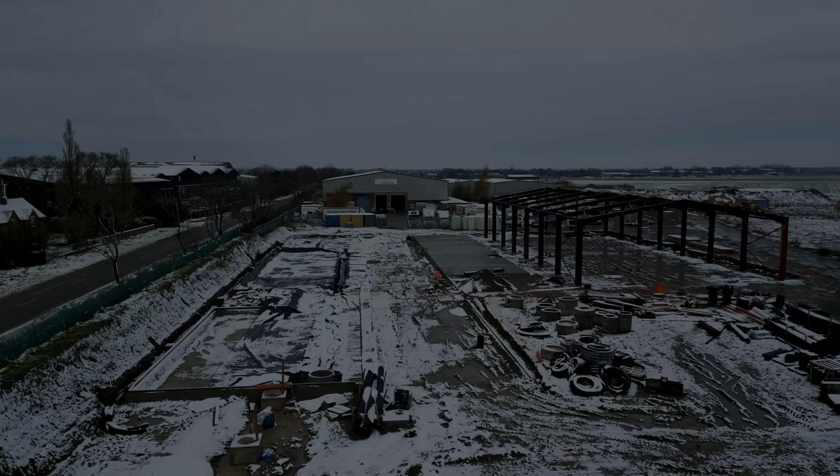This time on Blake Builds: in this week's episode, it's beginning to look a lot like Christmas. Warm enough for you? The boys go insane with the membrane, and Ollie goes insane in the brain.

Well, welcome back, you've joined us at an opportune moment. As you can see, I'm a bit hoarse still, so I'm not 100%, but I'm back at it. We are on the service yard, another episode on the service yard. Anyone would have thought it was a big job. As you can see, we've put our curbs round, which you'll have already seen us doing. The boys did a great job in my absence, although I've done a bit up there with them.

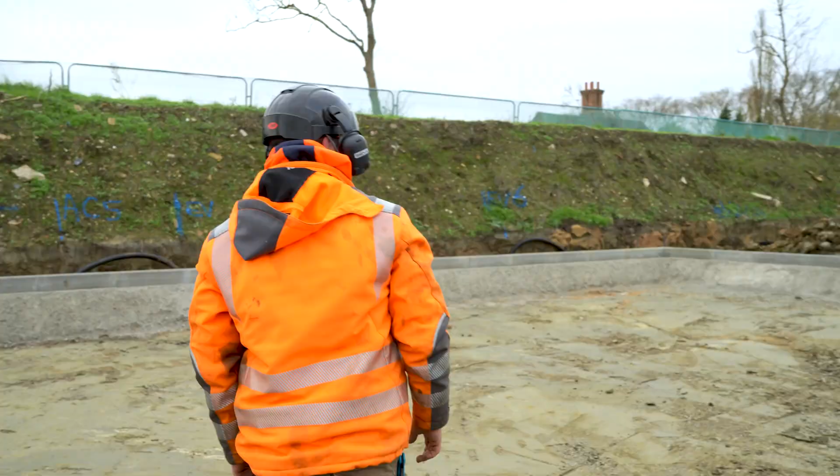Believe it or not, this depth is our attenuation. There's more attenuation in this. So we've now got to plastic line this basically like a pond and backfill it with 420 aggregate, which is an open aggregate, meaning it's got no fines in it and will actually hold water. Then there's this big trench which is like a sump, and all the water will run to that, run into here and run away. The idea is that when there's a heavy rain downpour, it will pool in here and slowly drain out through an orifice control valve, which is basically a hole... and it's 46 mil. So all the water from this whole area is going to go out through just a 46 mil hole. It's amazing, isn't it? There's perforated pipe in here, which we'll get to in a bit.

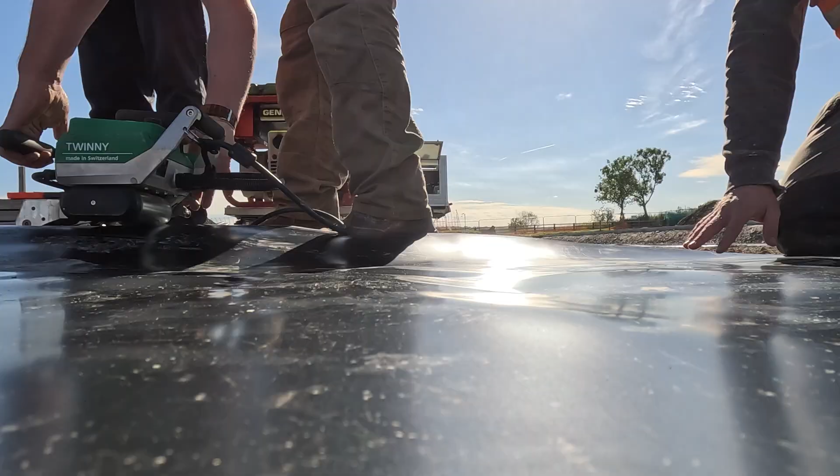But we have to weld and join this membrane together using a very fancy tool, this membrane welding machine. It's the same technology they use to cap landfill sites. Believe it or not, when your rubbish goes to landfill, as it breaks down it makes methane gas, and they cover the whole thing in plastic so they can capture the gas, then run generators off it, which generates electricity rather than it going into the air. So it's a similar thing, a bit like a giant pond liner. We're going to line this to hold the water in and then control the flow from it. Easier said than done.

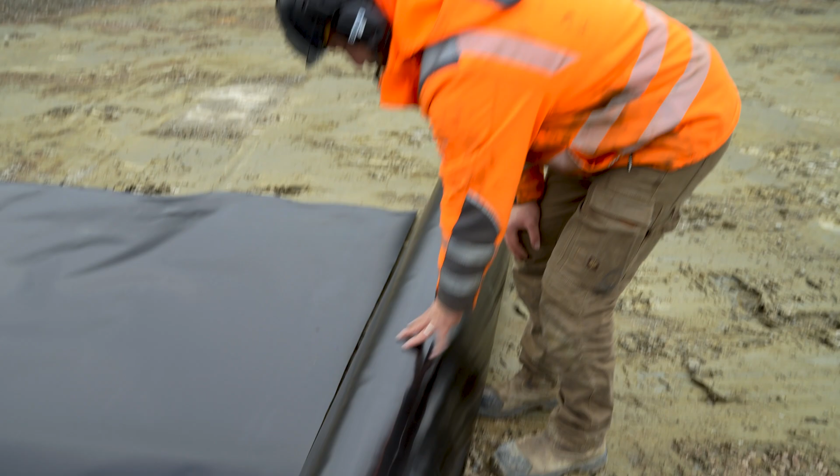This roll weighs about 200 kilos. So while it looks nice and lovely, it's an absolute nightmare for manual handling trying to move it about. We have to keep strapping it, lifting it, moving it. The biggest issue is it all bunching up.

So we've got a manhole that's going to go in here, just there, and that's going to drop down in there, but it needs to be encapsulated inside the plastic. So we've got to weld two bits together, push that down in it, and then weld a bit to go up the trench, which you'll see us do. Wish us luck.

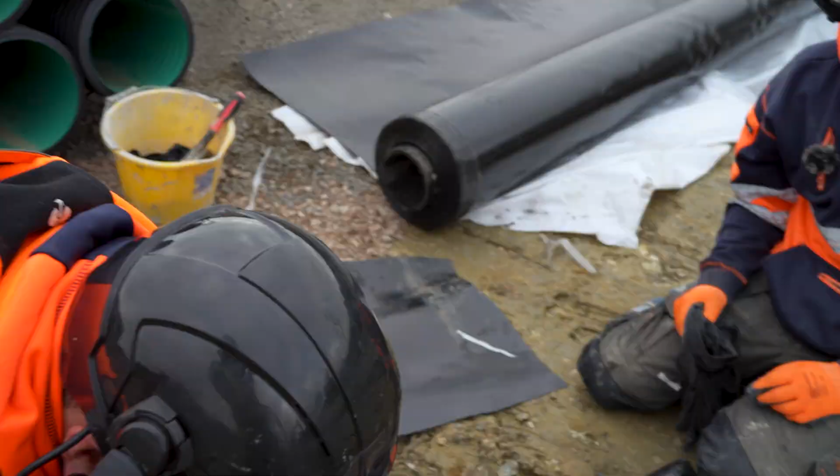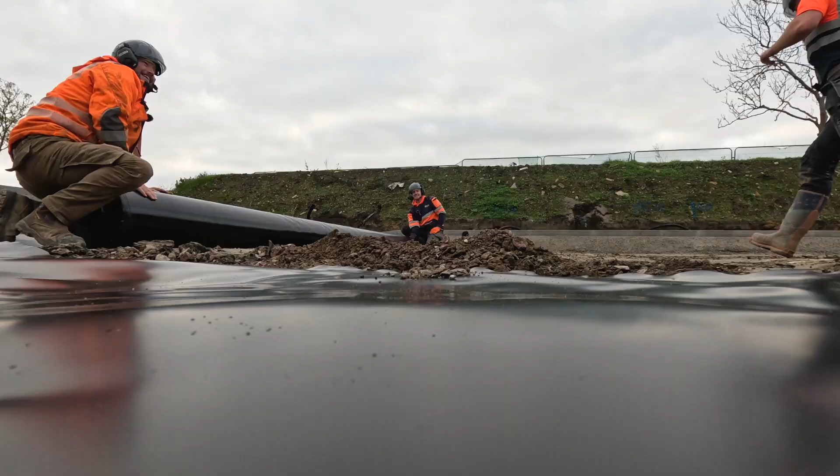We're going to go to here, a little bit further, aren't we? Back there - how are we going to get a nice straight line then? Cut. Use the edge of the roll. Where's Evan when you need him? This sort of thing is an Evan job, isn't it?

Grab your legs and pull you along? Yeah, good do. Cameraman needs to be stood where I am. No, he does - that's the money shot over here. No, he does not. Oh my God, you should see how weavy it is. Marco, if you're watching this - yeah, not good, not a great idea. Put that one in the middle like we do when we pick steels up, and you just touch it to the balance point. Yeah, then we'll pick it up. Sure thing.

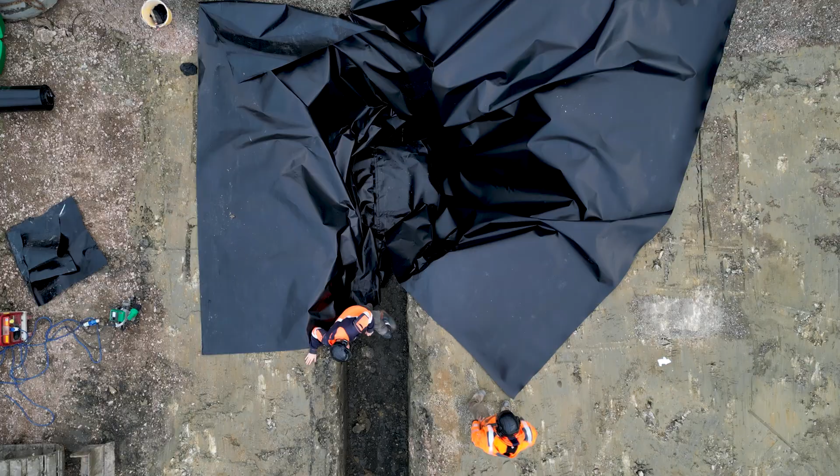Can't do it without folding it, can you? Let's pull this up here like the trench piece. Yeah, and have it sit in it and just have a look at how that looks, shall we? Right, you just stand on that edge. I'm such a child - when do you pull it that way? Did that hurt? No, that's fine.

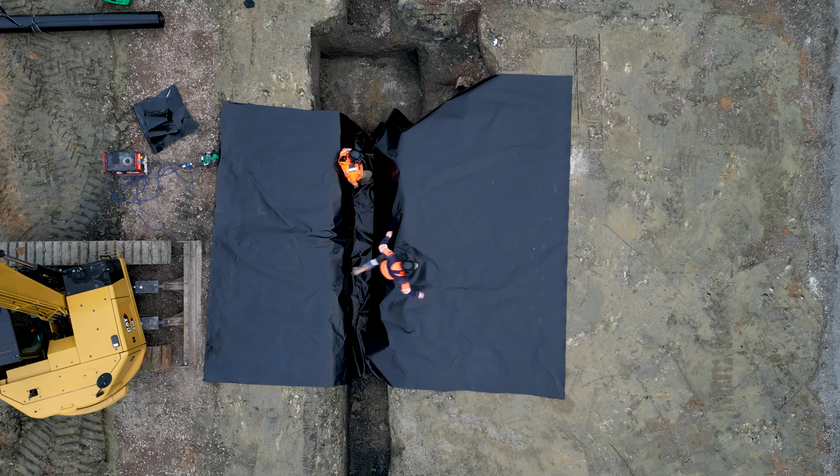And now to Evan with the detail. So, detail of mission control what we've got. Yeah, mission control, I've got a new screen and now I can see everything, so I can plug into the matrix.

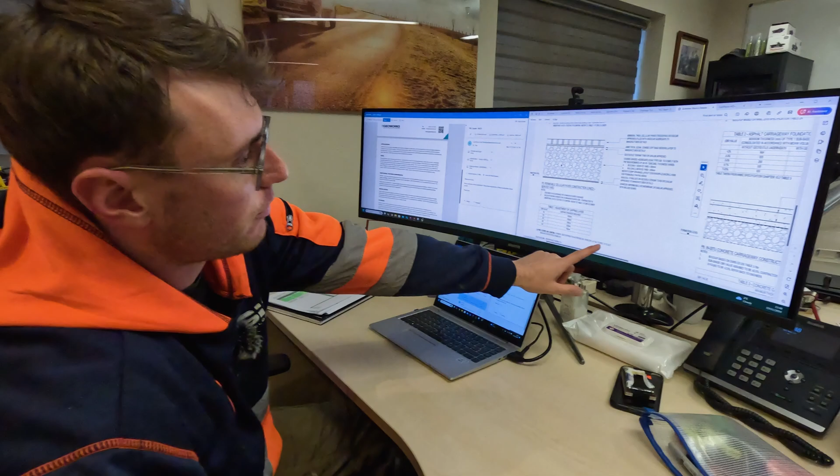You'll have seen this drawing before on the last couple of episodes, I think, where we've been doing a bit of concreting, and we explained a little bit about how we make up the ground underneath the concrete, where we've got the layers of the different things, the membranes and the hard core and the reinforcement. Well, we've got the same thing for these cellular pavers here.

There's a predetermined value that we've calculated by having CBR plate tests done to see how stiff the ground is, and that calculates how much hard core is required in order to be able to run a HGV over these pavers. You can see that it's built up in layers.

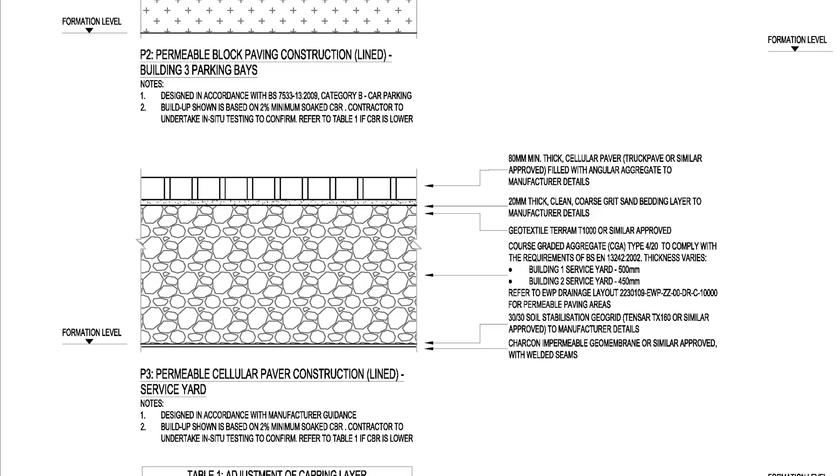So we'll start from the bottom and work our way up. You've got this impermeable membrane, a 0.6mm high density polyethylene impermeable geomembrane. This is a slightly different attenuation system here. They've got crates and we're achieving exactly the same thing, but instead of having the voids in between bits of plastic, it's in between bits of gravel.

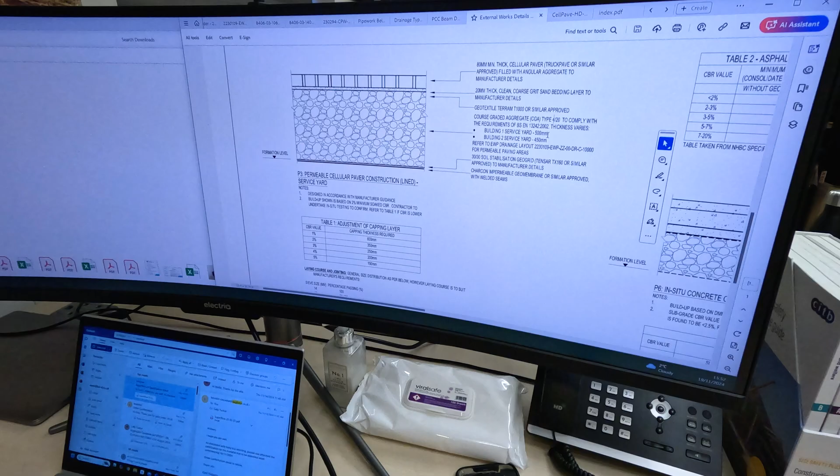We weld all that together, and then on top there we've got this 30 by 30 soil stabilisation grid. This is all of our aggregate here. This coarse graded aggregate type 4/20 essentially means pieces of granite from 4mm up to 20mm, and it gets graded through a massive sieve at the quarry. This is the spec sheet for it, showing the sieve sizes and what's allowed to go through.

On top of that goes this Terram geotextile that I was telling you about. That acts like a big blanket, containing all of the aggregate or anything sat on top of it and spreading the load out. So you require significantly less material on top of a bit of geotextile like that than you would if you were putting it directly onto the clay, because the bits actually sink into the clay and don't act as well, whereas this spreads the load out.

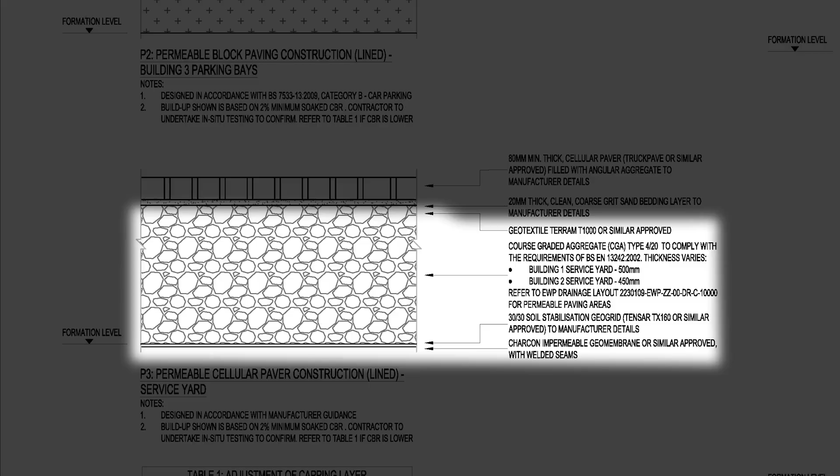So that goes on top of the aggregate, and then on top of that goes the 20mm blinding layer of sand, on which we will then bed these cellular pavers.

The product is here, it's called CellPave HD, and this is directly from the Groundworks website, the people we bought them from. So these pavers are what we've got on site. This is the curb edging, and this is pretty much how it's going to look, apart from the curves will be the other way around.

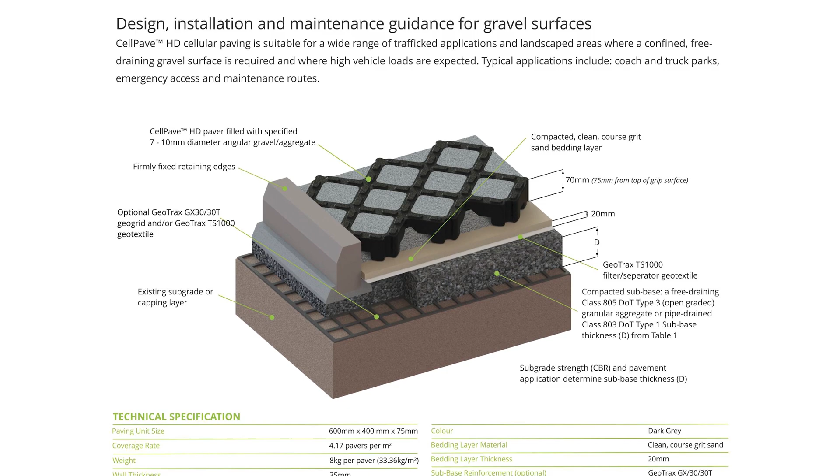And then in between the grids, we'll brush this aggregate, which will bind it all together and make a nice finished surface, a nice permeable surface for all the surface water to go through. Hopefully, not have any problems.

He's just showing his new big screen up. I am really, it is a beautiful screen. It's great, isn't it? That's a good illustration.

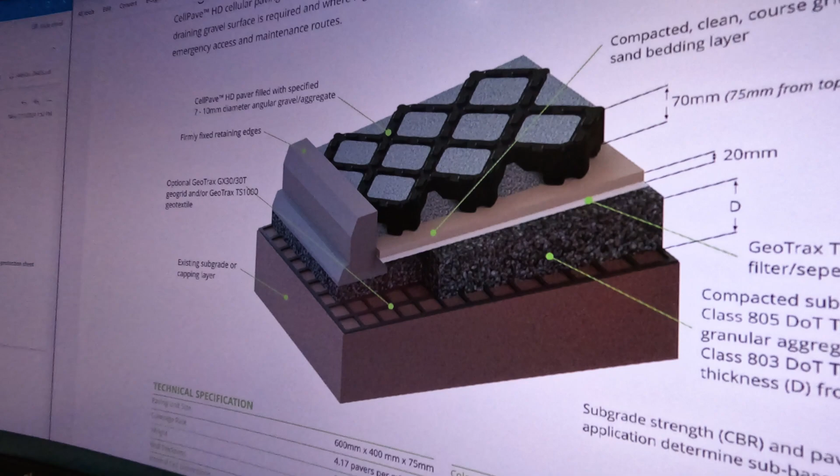Yeah, that's exactly what we're doing, something like that basically. This is good because it shows you the concrete makeup underneath the curbs. That's similar to what we've got, although we've put a load more concrete in. We didn't bother with the hardcore, did we? No, not really.

And this is the soil stabilisation grid. We've got an extra layer here underneath because we don't want any water escaping out. We want it all attenuated within that tank we're creating, because we want to stop any hydrocarbons or any nasties sinking into the ground. It's all petrol and everything - it's all about the environment, duck, it's all about the environment.

You may have seen us all scratching our heads yesterday when we were looking at how we're going to go around this manhole. As with a lot of things in life, have a cup of tea or leave it overnight and problems solve themselves, and we've come up with a solution. So basically I've hand welded it this morning with our hot air gun and the roller. We're going to exclude the manhole from it, concrete round it and basically encapsulate it with the plastic in a different way, which you'll see us do anyway.

Thoughts on this? Oh my God, it's hard work. This project is amazing really because some things are really easy. Some things that you think are going to be easy are hard, and things that you think are going to be hard can be easy. It's really weird and doesn't seem to make any sense sometimes, but positivity and perseverance always get you through, don't they?

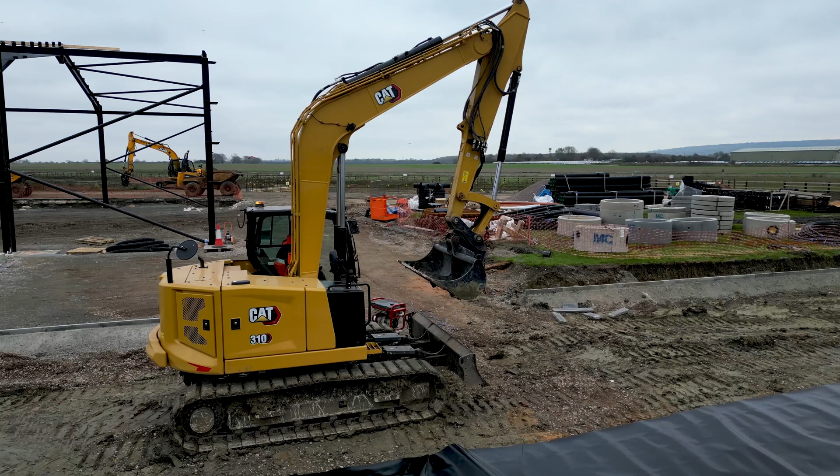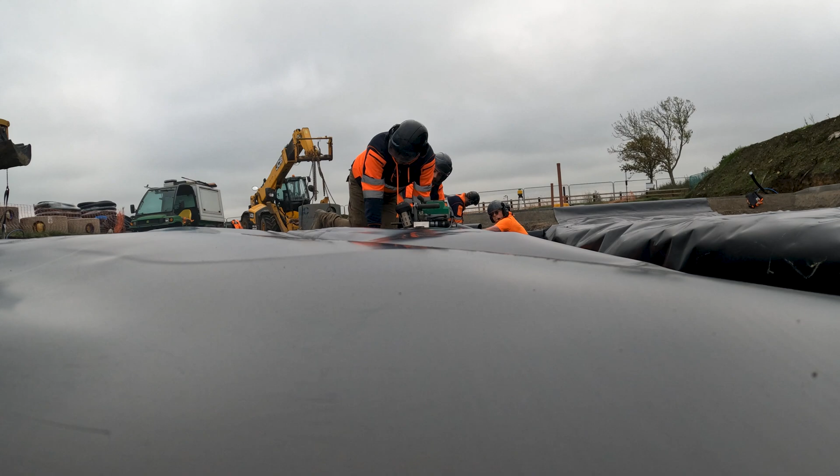So here we are doing a wonderful job of joining the membrane that goes underneath our attenuation in the yard. We're using a Leister, what's it called, a T720.

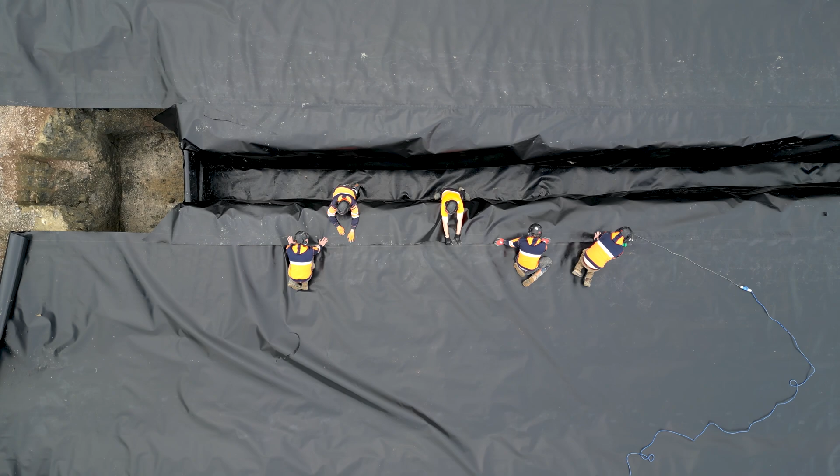So it's actually crushing the material together. It's got a Newton gauge on it, so it's crushing them at 500 Newtons. Newtons is kilos if you knock the zero off, so it's 50 kilos of pressure pushing them together. And then this hot air gun is blowing hot air in between the two layers, and it's being squashed together and driven at the same time.

Relatively straightforward and easy to use once you get it set up, but in site conditions it's quite difficult. Good weather today, but it gives rain next week, so we're trying to get all this done before the rain comes.

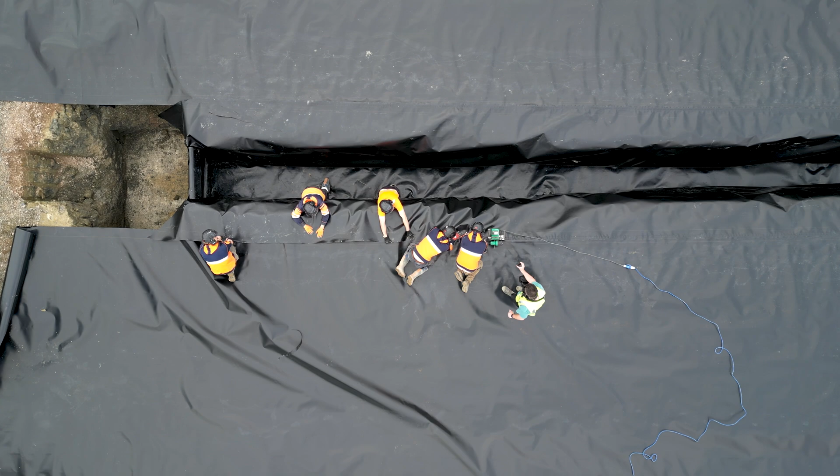Another cool bit of kit. We're not quite as excited about this as we were the Bomag, but it's pretty good. You just have to keep it in line, keep it straight, keep it going. 540 degrees is what the hot air's actually coming out at, and it's melting the two layers of plastic together for a permanent fix, basically. It's as strong as the material itself. Just takes a few cowboys to wrestle it - you'd come at the bit where it's all bunching up funny, wouldn't you?

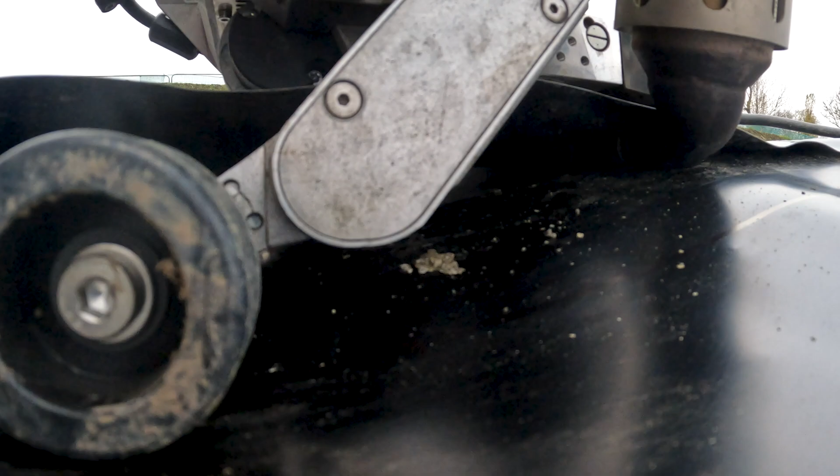So there you go, as you can see here, got the cage on the top, and it's feeding in along there. The bottom one is tucked underneath. You can see the hot air is pinched in between it, and then the rollers at the front - those rollers are knurled, so they've got a pattern in them, which enables them to be crushed up together.

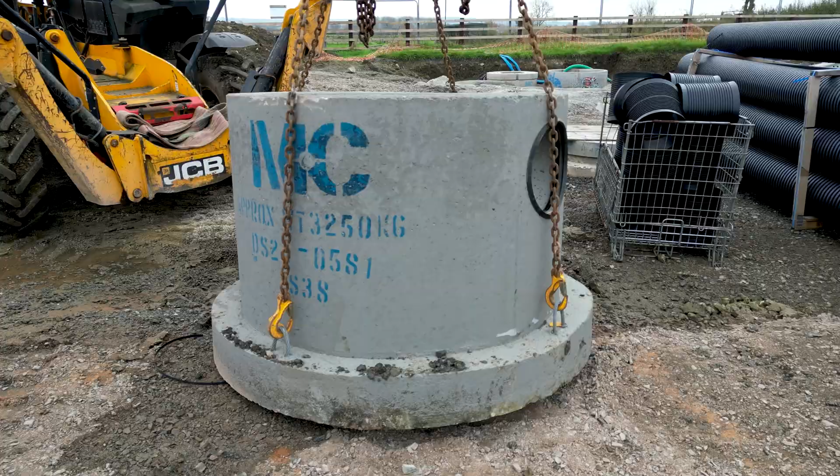How's that back edge looking? Yeah, beautiful. Go down and boom in a little bit.

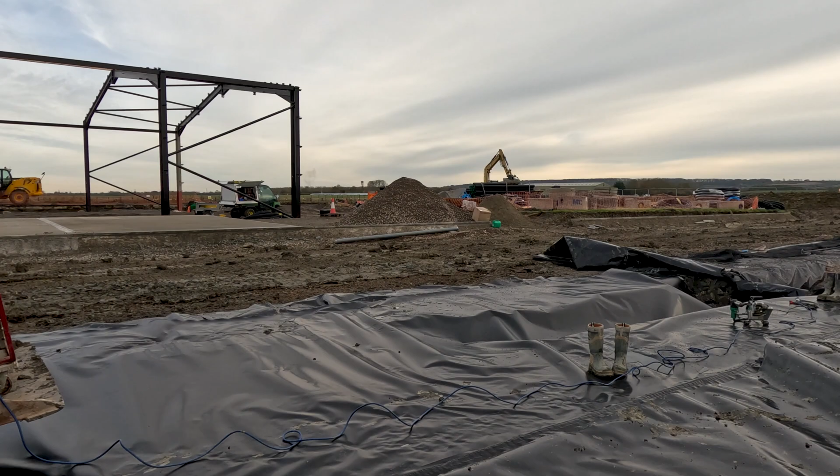So we're putting plastic underneath. You can see over there that we've got our trench in already - there's a trench behind us, but it's stretched over it at the moment. We're racing because it gives snow tomorrow, tonight, certainly rain, so we're racing to try and get that done.

We've welded this, which you've already seen us use the £12,000 welding machine, which I can't quite believe is 12,000 quid. But it's only £450 a week to hire. There's only 4 in the country though, so not many about to hire anyway. But it makes light work of that - 2.3 meters a minute we were doing there.

So now the job is to try and get this clean again, ready to join the next sheet. Should be relatively easy actually. We've just got to clean this off, haven't we, so the welder doesn't get chopped up full of clay.

Yeah, and I was thinking about this - we can lay the next sheet here. Oh, that's a good idea, to fold on, exactly the same as that one. And then we can weld it down there. All we've got to do, because we've got to clean that side. Oh, you only need to clean that side then, just got to clean the top. And that's why you're the boss. I don't know about that.

A clever man wouldn't be out here in his socks, and you with your feet out. Ollie's now got wet and dirty socks, so when it comes to put his boots back on, his feet will be cold. I went for the option of saving the socks over the short-term pain of having cold and wet feet, so.

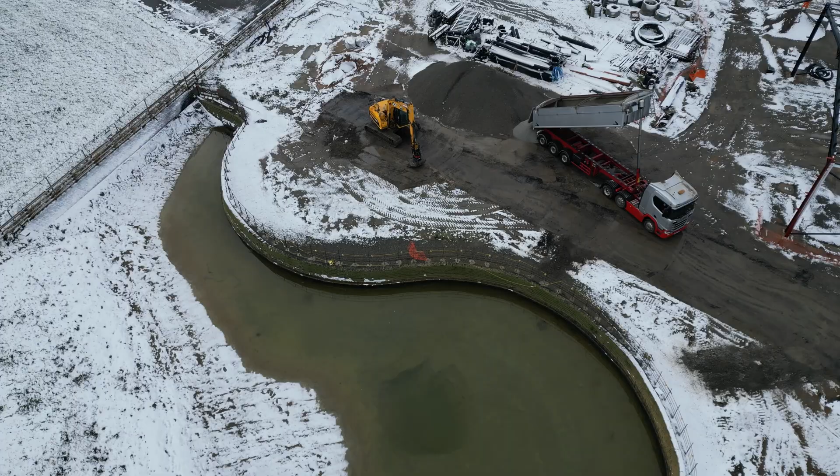Afternoon, all right. Warm enough for you? Oh, only just. So we've had a load of snow overnight, which typically would happen when we've started to dig the rest of the service yard off, and we've put all that membrane down, which we really wanted to keep dry and clean. So it snowed - makes sense. That's usually what happens, something goes wrong when we decide to start something, but it's fine.

We've worked around it. You can see that blue mark on the floor - that's basically the junction between the impermeable part of the service yard, which is the concrete, and the permeable side, which is the cellular pavers. This Celpave HD paving solution.

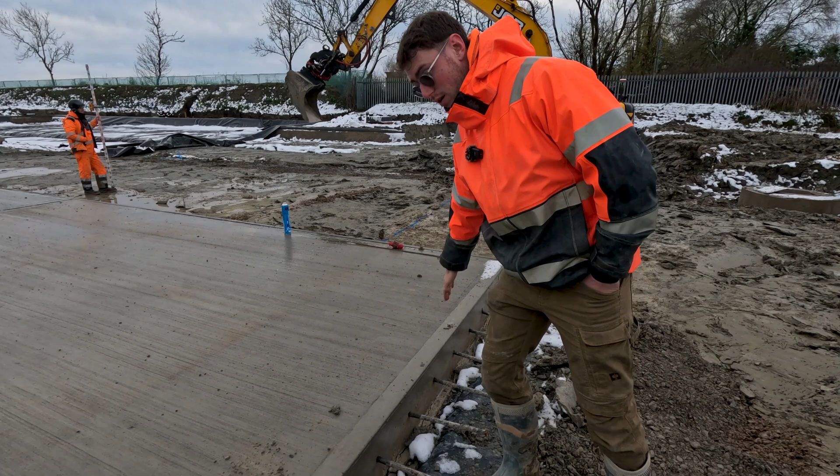So I've used a spot man to mark out every metre or so, and they've pinged a string line in between to get it nice and square, and sprayed it out on the floor. Exactly what we've done here with these pin curbs on the edge of this part of the loading bay, they're going to do where that blue mark is, except this time we're going to use some steel - 6mm thick steel, 300mm deep, comes in 6-metre sections. We're going to use that to make some forms, some shuttering, similar to what we had on the sides of these loading bay sections, except we're going to make them ourselves and bend it round on a radius.

It's been a while since I've driven the Gator, actually. Yeah, it's been a while since I've been in it. Got a bit of a roadblock coming up by the looks of it.

So I'm just off to show you these cellular pavers that I keep banging on about. We've had loads and loads of them delivered, and this isn't all of them - I've postponed the order ever so slightly, but here they are. Pallets and pallets. Oh my god, I had no idea these were here. Tons of them. So we put them up out of the way because, I mean, you can see how many there are. Pop out, I'll show you.

So this is what's going to go on top of the permeable area of the service yard. These are rated for HGVs to run over - a really, really solid product. Got them from a company called Groundworks. We had them come out and meet us and show us the product, send us some samples. And they're made out of recycled plastic - you can kind of see all the little bits in them.

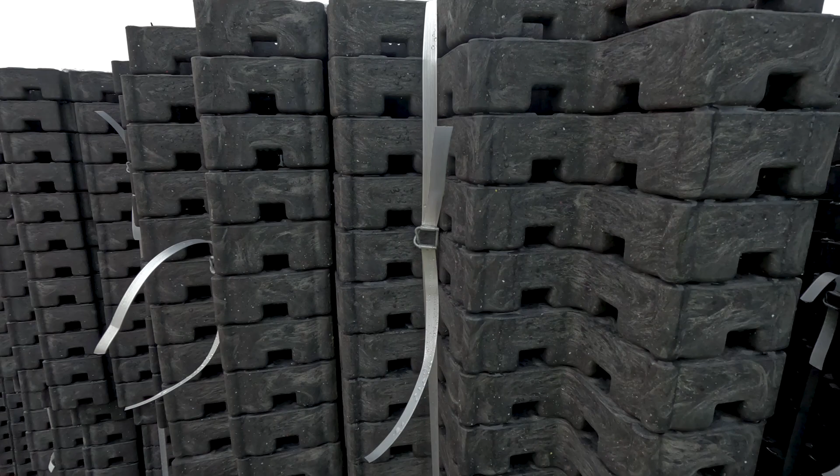And it's kind of in fitting with what we're trying to achieve on the project - use recycled materials where we possibly can and sustainable building practices. There's another product very similar that we had a look at to start with, but I did some research and they were based in Germany and a bit more expensive. These are manufactured here and distributed from this country, so lower carbon footprint, lower embodied carbon, recycled product.

It's a good bit of kit. Probably, I'd say it's probably the same amount of money to do this than it would be to concrete in the end - probably a bit more time and effort to do this. There's a massive manual handling element, these pavers obviously have to be laid by hand. It'll make everything so much easier though - there'll be no more pumping out like we have to do every single day at the moment, because the drainage system will be up and running. It'll keep the whole site cleaner and it'll look really good on YouTube, which is obviously the most important thing now. Stay tuned, that's it.

Right, let's get going. Whoa.

Hello, Mr. Blake. Hello, Mr. Newbold. It's been a while since we've done a little walk around together. I know. So here we are - welcome to our swamp.

Biblical amounts of rain, was it? Biblical, yeah. I don't know, Mother Nature's always out for you, isn't it? It must be funny being in the profession of meteorology, mustn't it, trying to predict the weather. And it's obviously very unpredictable at the moment - I'm going to be kind and say it must be unpredictable, because they're not very good at it, are they? They only seem to be able to do the day almost. Yeah, like last week we looked and it was going to rain all week, and now it's all right.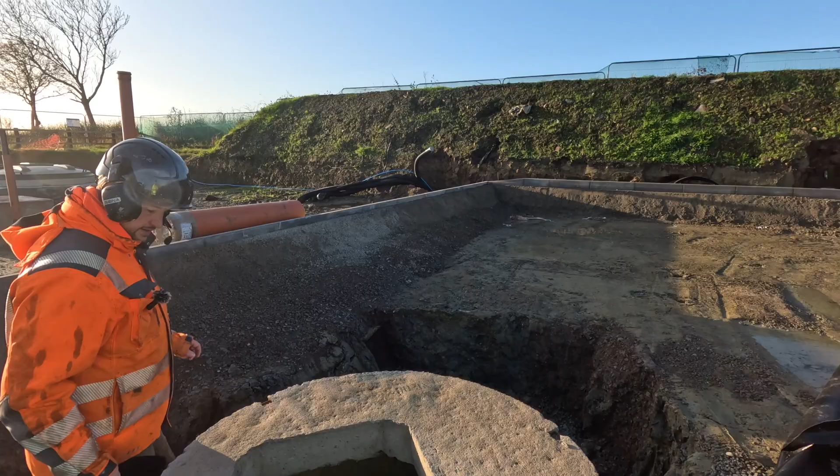Now go on here, it's a bit slippy. So you can actually see that our attenuation in here is already working - this trench is already full of water. So you can, in that gravel, look, it's actually full of water already. We're still on our petrol pump at the moment. Oh yeah, that's full as well, look.

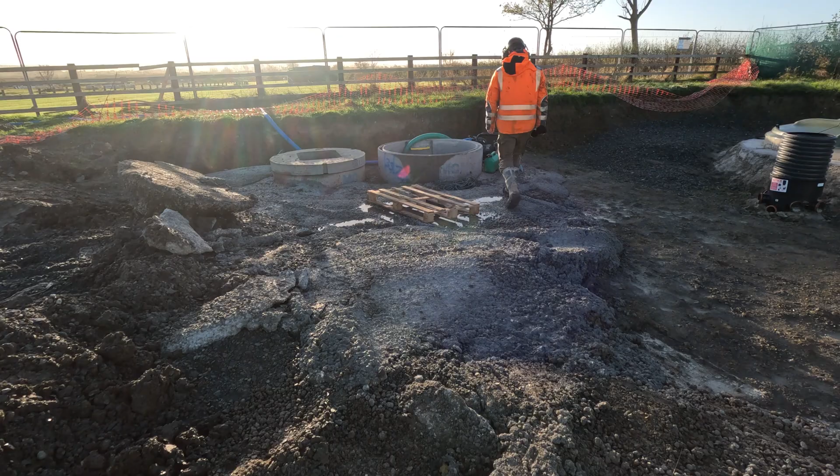Trials and tribulations of filming on a construction site. Oh, look, you've got a dirty muff. You don't want to get your muff dirty, do you? Christ. First rule of anything is to keep your wind muff clean. Yeah, terrible. Oh, thanks, mate. I'll clean her up inside, probably.

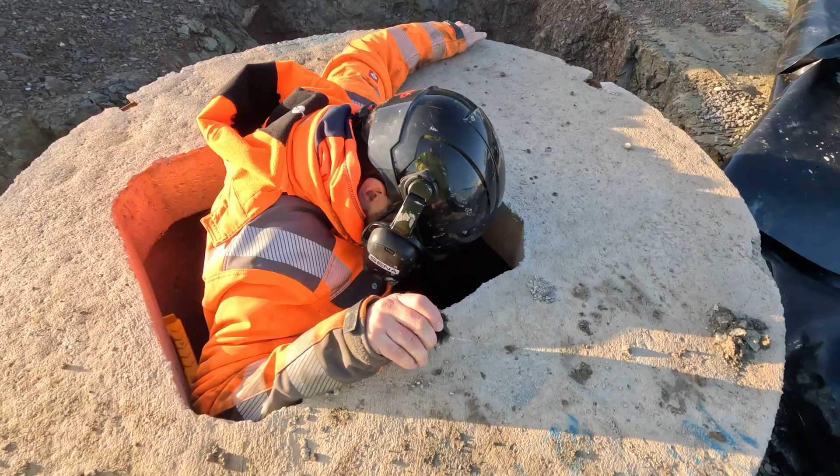We've got a bit of water. Yeah, have you? You got some available? Going in - oh, it's deeper than my boot. Oh, God. Watch your head on the way up. Watch me drop mine in. Oh, this will forever be the muff cleaning manhole from now on. Oh, you know what, go on - the bloody boot's got a hole in it. I think I had that this morning. Oh, yeah, I found the trickle. I put my boot in the water, haven't I?

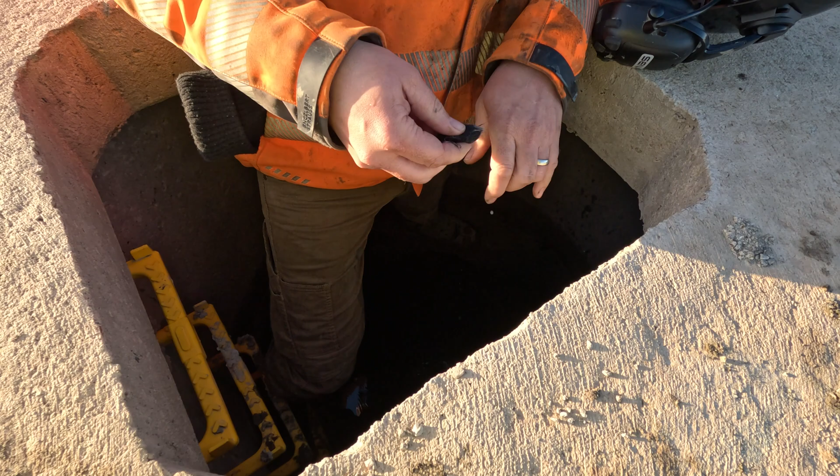Oh dear, we've got to dig all this off. This looks horrendous at the moment. We've actually left 200 mil on here for this exact reason - it's like a sacrificial layer. So when we come right to the very end, we'll scrape that off back to the finished height. It looks a lot worse than it is.

We've got 3 manholes to put in here, but they're almost at the surface, only down a little bit. They're level, and they've got permeable pipe in them, and the idea is that it collects the water that drains in here. Think of it like a giant pond, but filled with gravel, and you drive on it. This pipe work enables the water to go down through that interceptor, to that tank, and then be pulled away. The idea is it will attenuate in there, gathering up.

So what does the placement of 3 new shallow manholes give you that can't just run off into this deeper trench that you've already got? In a flash flood event, it needs to be able to move away. And also, in time, the attenuation could well start to silt up, so you need a way of clearing it.

I made that up on the fly, really. Well, it doesn't convince me, having them, really - it should go through that gravel and go to that trench, and it should all go out that trench. It's another rake of expense. That was one for the engineers, was it? I'm sure there's a logical explanation to why we'd need to spend thousands of pounds on manholes and more perforated pipe. There's logic there, I just can't see it, I'm sure.

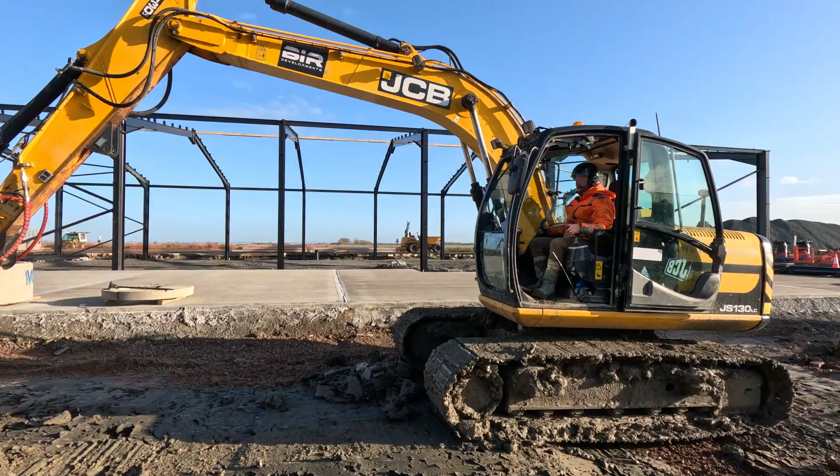I love that - these ones are slightly different to the other ones. These are literally almost at surface height, just in the attenuation, and in fact we've got to dig a little trench in because they act like a sump, basically, to drain off the ground.

So the plastic is going to go over this next, which is a little bit different to how we did the other stuff - because we excluded the manholes from it last time and plastic round them. Whereas this time we're actually going to leave the manholes in it and plastic underneath them, encapsulating the whole thing.

I'm just pulling this off level, or close to level. Won't be perfect, but it'll be pretty good - he says as he takes a big 3-inch chunk off.

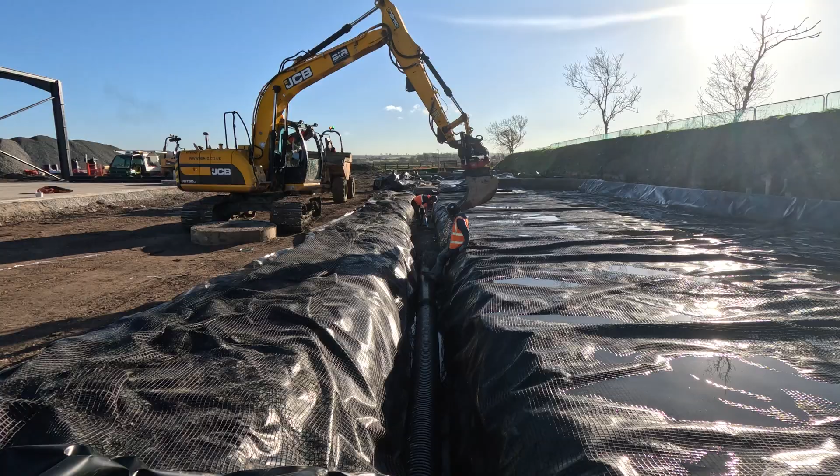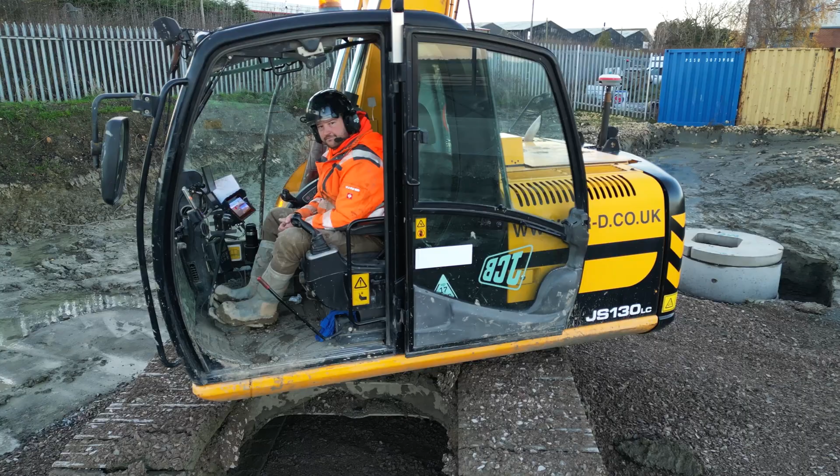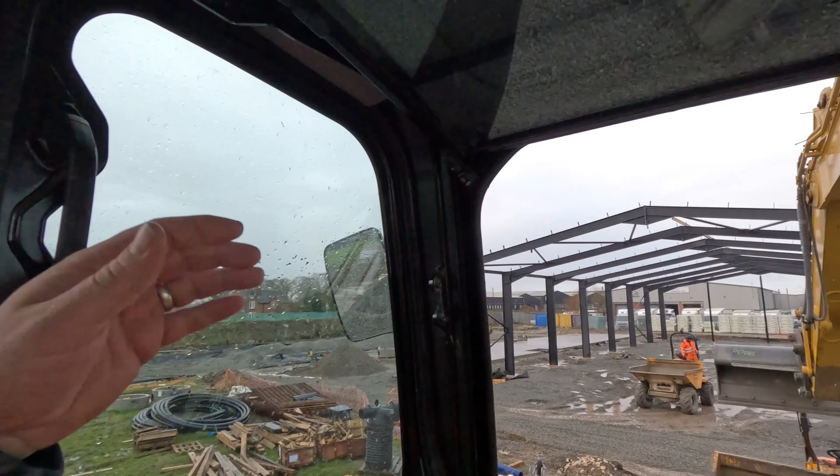So here we are digging again on top of the pile - Mr. Benjamin Cora over there. I've got a little pouch with the kit in. And yeah, so we are atop, about to go right down, and we're going to go and level off a bit of ground.

We've been loading out together - Ben's been doing it with the dumper and I've been loading him. Clean, almost like gravel, but it's granite. I've not left that digger in a particularly good spot, have I? Getting carried away with the camera, that's what the problem is.

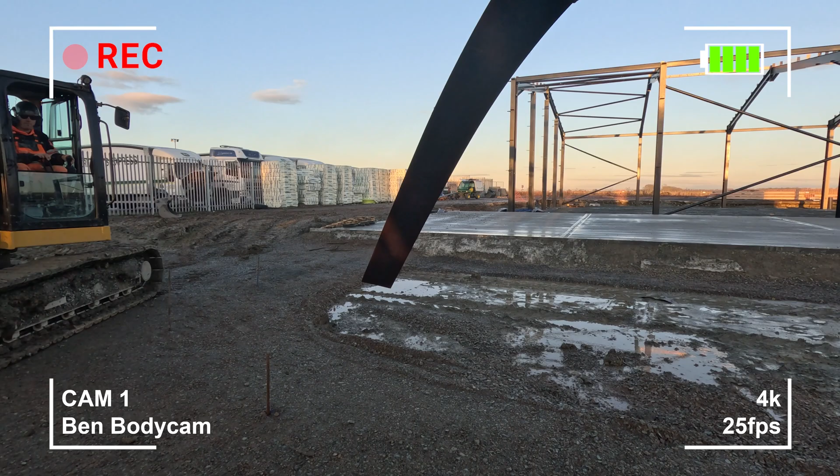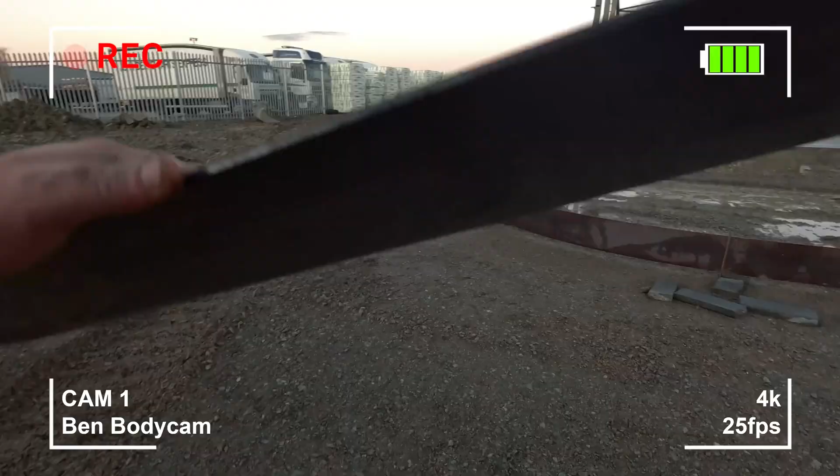Come towards me a bit. Okay, put it down slowly. And stop there. Yep. Down she goes.

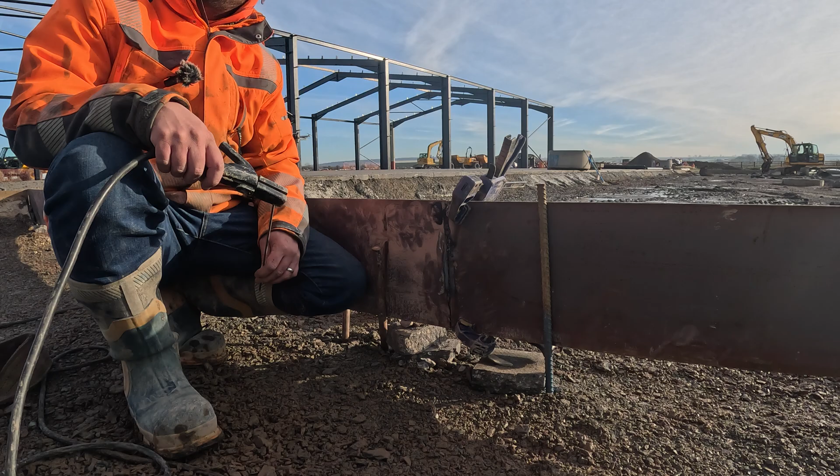So welcome back to Oli Blake doing another task. Not that I'm a jack of all trades, master of none, I think is the term, isn't it, that everybody uses. So I'm going to attempt to stick this together with a bit of stick welding.

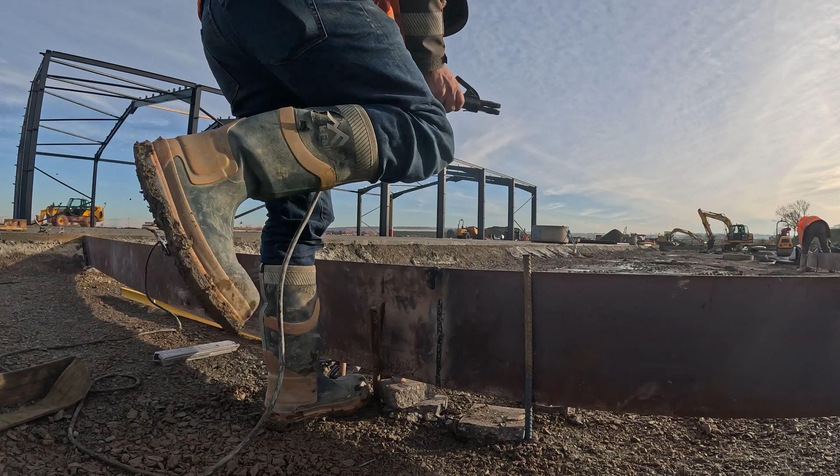I'll give that a tap off. I blew it away in the last one. Let me just put a tack on the very top there, just to...

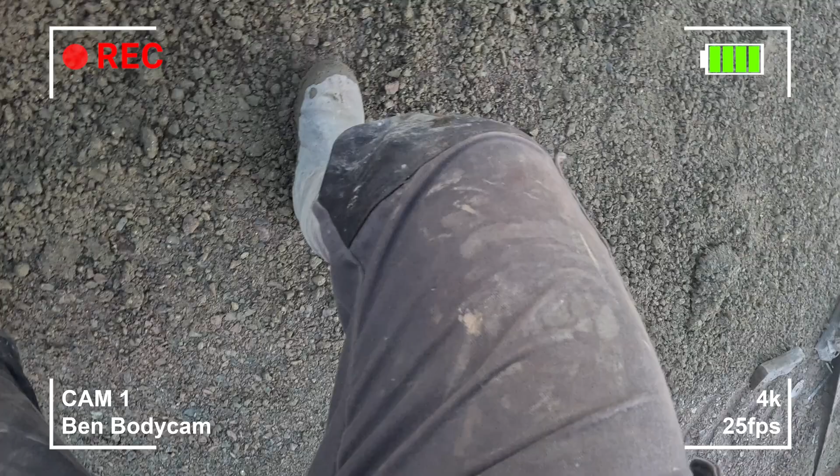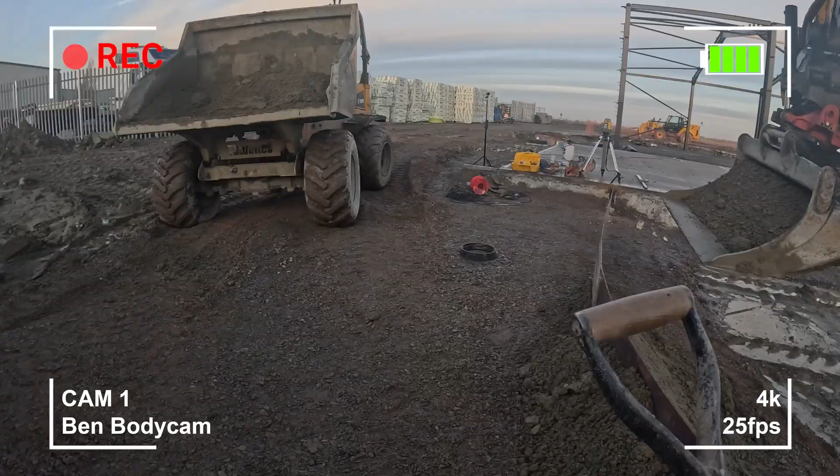For a bit more then? Yeah, man. Around your side, yeah, just a little bit. Yeah, keep going round. Oh. Let me go the other side first. Yeah, go. Yeah. About there. Yeah.

Good job we didn't have another 8 cube, innit? Oh, it swung, it wasn't me. Keep going down that side, man. Lovely.

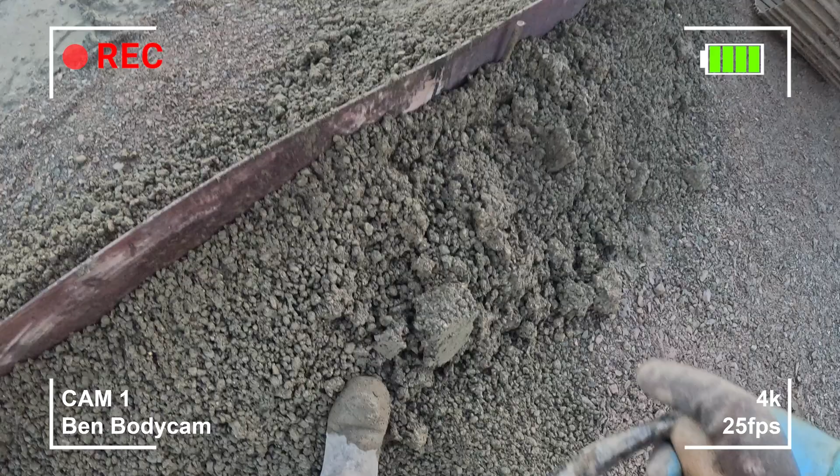Do you want more on the end or do you want me to wait a minute? Just wait a minute, mate, please. Bit more just on this end, Ollie. That'll do it, I think. Just tickle on the far side? Yeah, just down here, only a little bit.

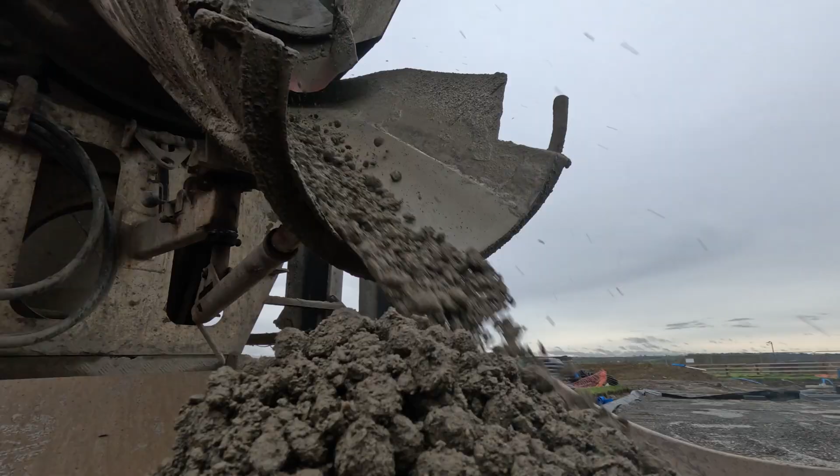More ultra flow. Yay!